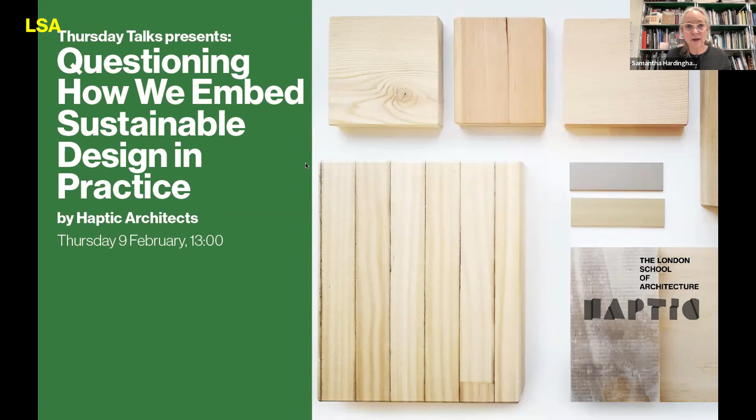Thank you, Sam, and thanks for the invite. It's really nice to be able to talk today. So what I'll do is I'll just quickly share my screen and get this presentation up. And here we go. Hopefully you should all be able to see my screen now. I'll just make that full screen.

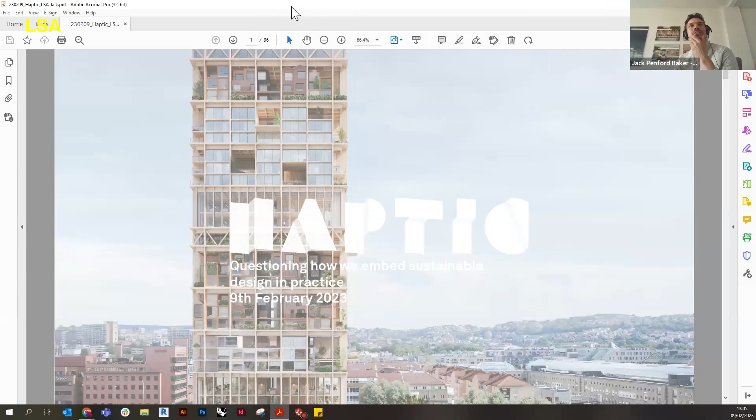We formed around 13 years ago, really a series of friends from university that came together and decided to go out on their own, so to speak, and set up what is now known as Haptic. This is us from the summer, out in Oslo, having a very nice time, but a very important time to meet with our fellow colleagues around our different offices.

That summarizes a little bit about us as a practice. We're around 45 to 50 people in total, based in London, Oslo, and also more recently in Bilbao. Our work bridges all three of these locations, but also further afield, both within the UK, Norway, and around the world.

The real purpose of the talk today comes from a conversation I was having with Sam about this idea of sustainability, the importance it plays within the work that we do, the impact we have within our profession as architects and designers. But I want to acknowledge there's a whole range of approaches, and there isn't necessarily a right or wrong. It's about a direction of travel that we're going in as a profession to try and help tackle this.

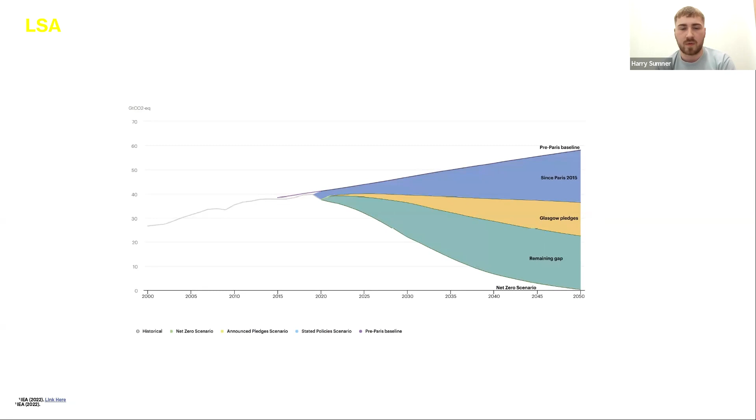The commitments that we've made—this you might have seen before—is from the International Energy Agency's recent predictions about the targets that have been set at national level and whether we're going to achieve them. It's not just a case of continuing with the same trajectory, but we have to keep increasing it to get to net zero carbon by those targets. So we are almost not working hard enough just yet. And that's really where this talk comes in.

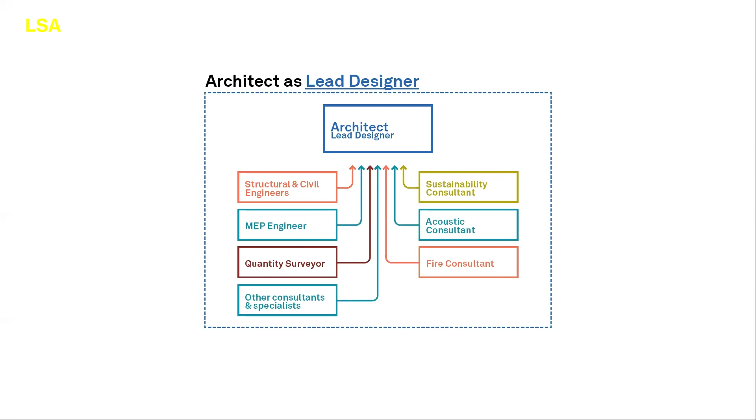Looking at the traditional or typical model for how we design buildings, organizationally architects are often the lead designer with lots of input from different consultants, bringing these elements together with lots of back and forth between the architect and various specialists. But today we're looking at a slightly different approach that's becoming more relevant, which is the architect having some in-house capability where it becomes more integrated, bringing some of these roles closer to the design process.

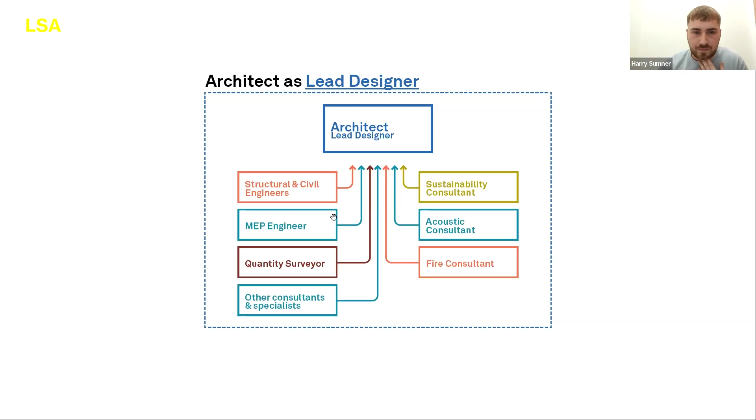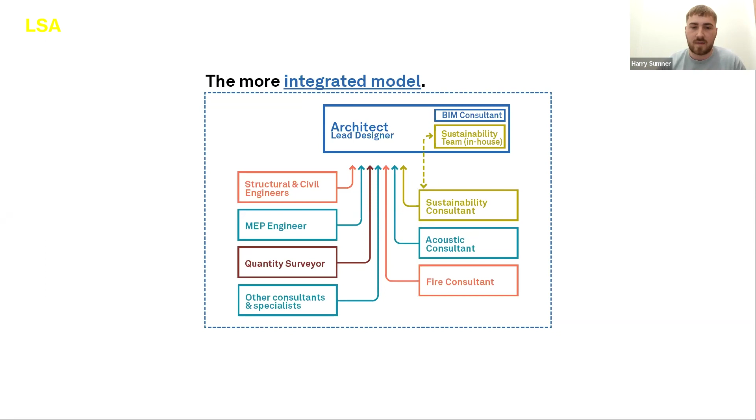Which is what we as Haptic have. Similarly, many firms are now taking in BIM as well and have other capabilities. Sustainability is the one we're looking at today—how we bring this in-house and close that gap between consultant and architect, making that translation into design more prevalent and efficient. It's not just us doing this, and many big firms have been doing this for a long time, but also a lot of small and medium-sized engineers are beginning to have their own in-house sustainability capability. If everybody is getting this slightly greater capability within the design chain, the product at the end must be better.

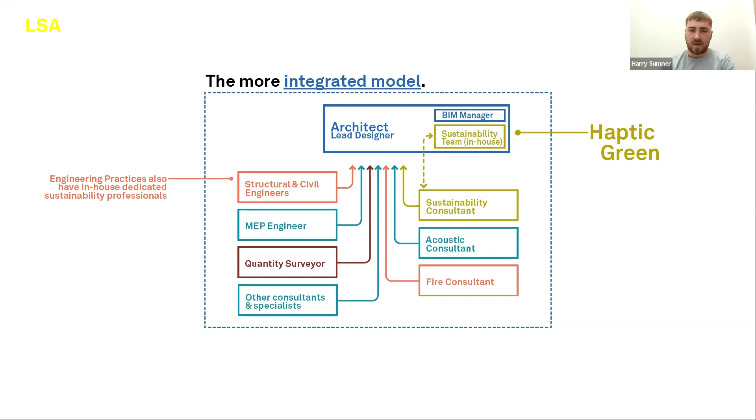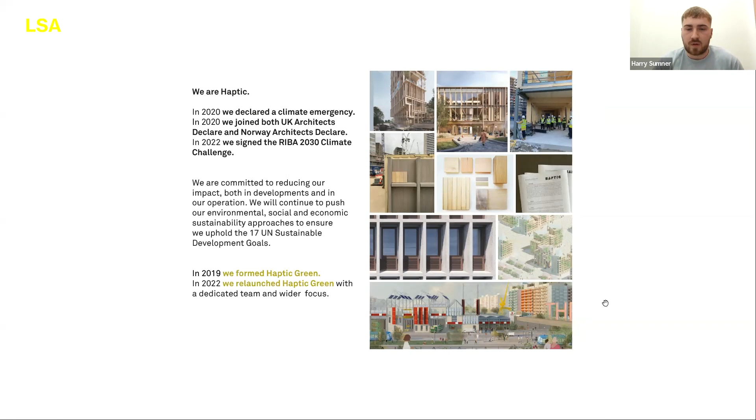That's the idea, and this is where Haptic Green comes in. We are the sustainability team, but also research and development embedded within Haptic. As a practice, we've made declarations both in the UK and for our Norway office, and we've set ourselves the challenge of adhering to the RIBA 2030 climate challenges, as well as achieving carbon neutral status by 2030 as a practice. Haptic Green comes directly into trying to achieve some of these goals, but also covers a few different areas.

We have 5 key workflows for Haptic Green, which we see as encompassing our role. The first, and arguably most important, is design and how we influence the existing design processes in the practice. But then it's about internal knowledge transfer, ensuring that everything we know as a practice—for new people, existing staff, and across our different offices from Norway and Bilbao—what knowledge we can bring and retain within the practice, and then deploy it when relevant to different projects to ensure the best and most sustainable outcome.

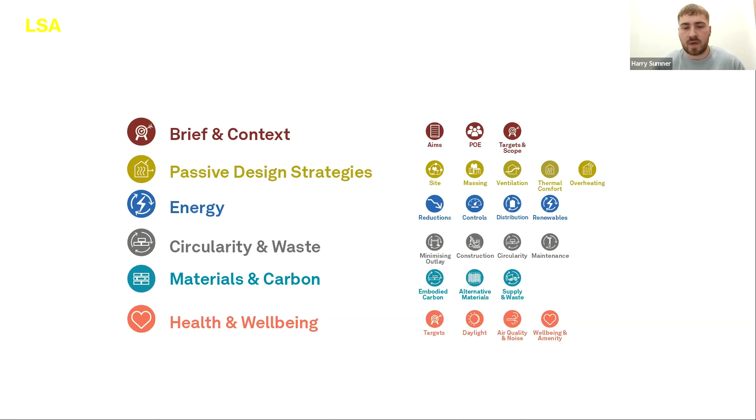So Jack, if you want to go to - about setting targets, for us we have come up with our own set of parameters that we as Haptic want to design to, and these are our key focuses. We have targets for a lot of these which align with the RIBA 2030 challenge, but also our own internal aspirations for energy, circularity, and all these different elements that we think are crucial to the total performance of the building at the end.

But to make this more manageable, one of the things we've done internally is create a design guide that helps us deploy these at really early stages. So from feasibility to stage 2 or 3, we have checklists that allow us to go back and ensure we're safeguarding the decisions we can, and we're questioning, where necessary, consultants' decisions to make sure we're really getting the most out of the projects, right from the beginning.

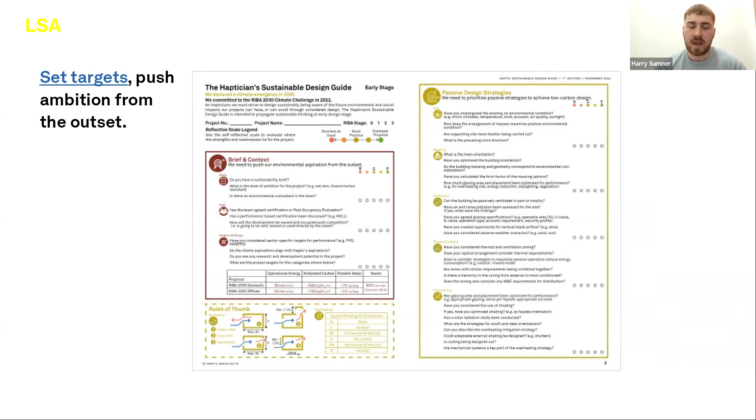The second point was to actually deploy these sustainable design principles right from the beginning. So even when we do feasibilities or initial concept design, it's about trying to embed those principles as early as possible so that they are safeguarded and become part of the narrative of the building as it develops.

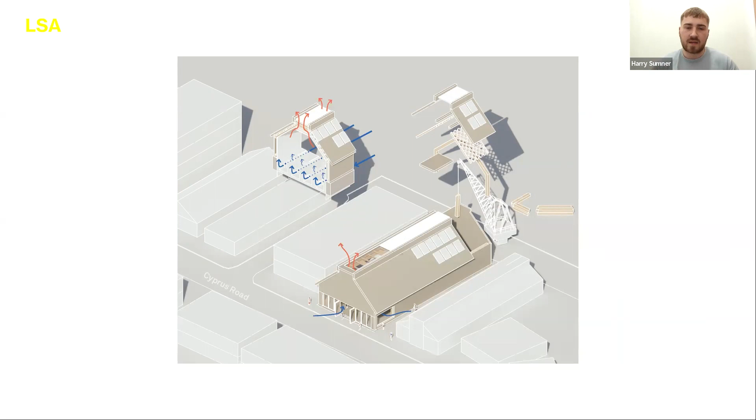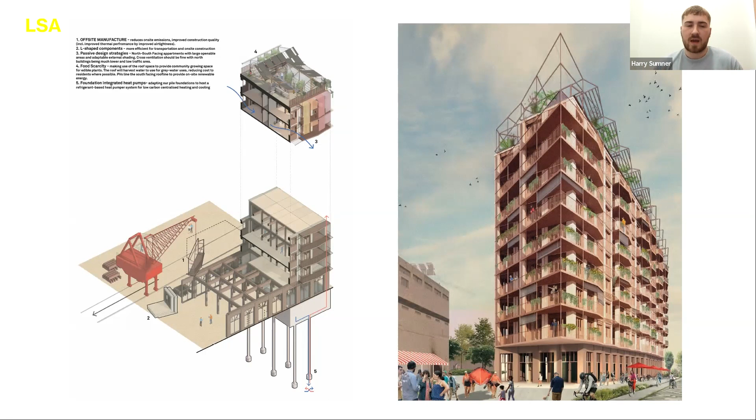Again, seeing how allowing these principles that we've come up with early on develop and influence the architecture itself, rather than becoming a back and forth between us designing and then a consultant trying to make it work from an environmental perspective. We allow some of the principles to be right there from day one, first discussion - this is what we're aiming for - and it becomes part of the narrative of the building.

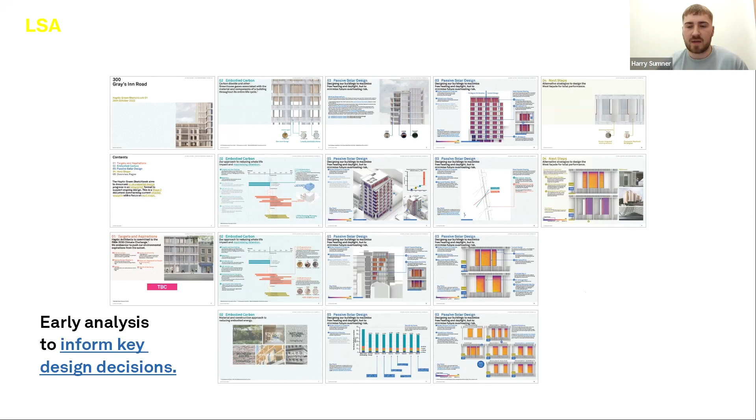Just as much as possible, integrating this into the workflow with an agile approach to analysis. Here's an example of GAs thinking about how daylight impacts it. If we had a consultant doing this, the time frame would be so much longer than this quick process of analyze, reassess, inform design and change, then assess again. So in that sense, this is the most important part of our role in the design process - once we've secured the initial strategies, it's about how we allow analysis to inform design throughout.

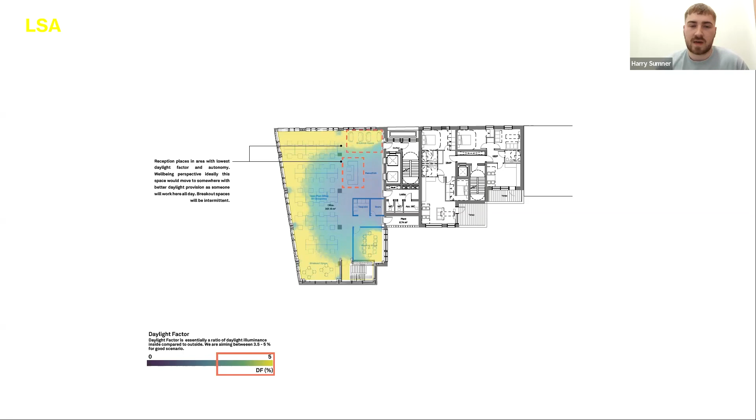There's another example of that - same process again, just agility. When we're modeling in the very initial feasibility stages, we can still be thinking about those sustainable design principles to ensure we don't commit to anything that doesn't work in future, and we come out with a much better outcome that has a more informed design intent.

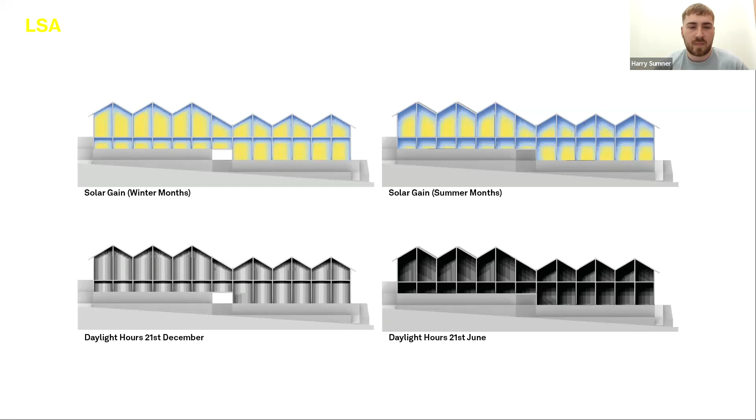And then I think the final one is just about employing a 360 degree inquisitive approach. We're not precious about the projects. In this quantifiable stage where we begin to review the projects, we have to be really open and transparent and inquisitive about what has happened, what we have done, and what we could have done better. That is how we close that loop and allow future projects to benefit from any findings of the projects we have completed.

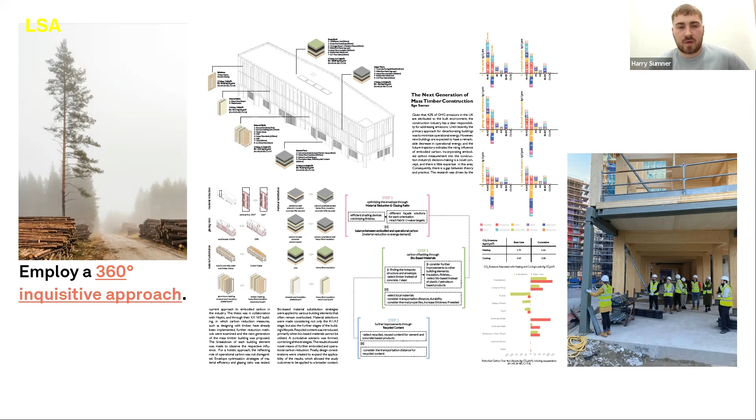The final bit is that we take that knowledge and share it between the practice, and ensure we document it so we don't miss any lessons learned. These two relate to residential and construction, but the idea is we feed everything back, because people are working across offices and different projects at different scales. We want to ensure that when we start the next residential project, we can already skip through some of the testing phase and understand what worked really well in the past and what gave us the best outcome, to really springboard the design process next time.

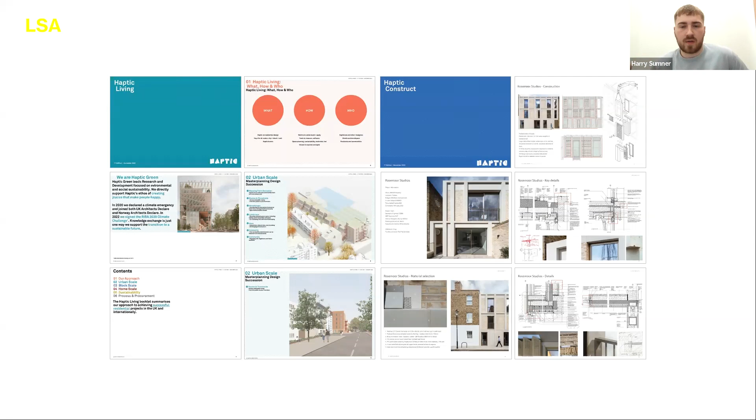So in that sense, it all closes the loop, and hopefully the idea is we just continually get more sustainable and more impressive outcomes.

As Jack already said, collaboration is key for us as small and medium-sized practices - that's something we've found incredibly important. On that diagram I showed at the beginning, that outer network ring - we're in discussions with many different universities, practices of similar scale, but also larger practices, constantly, discussing things across the whole range from design, operation, through to materials and research. That's really where the biggest acceleration in information comes from - through that collaboration network - and for small and medium sized practices that is the only way to really keep ahead with the way the industry has to change.

Great, thanks Harry. Before I go on and show a few examples of projects from in-house at Haptic, I wanted to dwell a little on the work that Harry does for us and the wider Haptic Green team in the practice. As architects, we have to do a lot, and we're all trying to do our best in terms of creating a sustainable future in the buildings, spaces and places that we design.

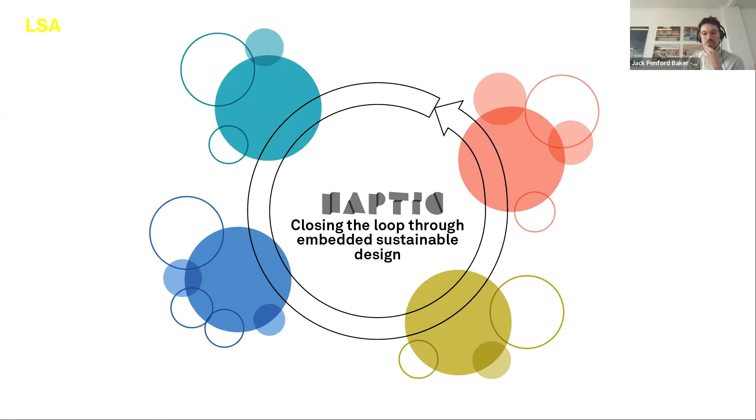So what I wanted to do is take you through a few schemes where Harry's touched on some projects in more detail from Haptic Green's perspective. But from an architecture side, I wanted to pull up a couple of these projects where they exist within that world and system diagram that Harry was showing.

So the first project is an inter-practice one in Bergen, Norway. It really comes from this idea of collaboration. Out of the 2016 referendum and Brexit, there was a conversation had between several friends and peers within the London architecture network, who really missed the fact that we're leaving the continent and wanted to continue a relationship with Europe, and beyond really.

So what was formed out of that was this network called Londonon, which includes ourselves, Haptic, Morris + Company, Gort Scott, Turner Works, Piercy & Co, Elliott Wood, and May Architects, and I believe a couple of others as well - forgive me if I've missed any off. But really it's a way to research and learn from places outside of the UK.

But at the end of a few years of doing that, and in lockdown, it became clear we still wanted to work out in Europe and abroad. So we looked at opportunities and competitions that align to the collective values, and we began to enter into them.

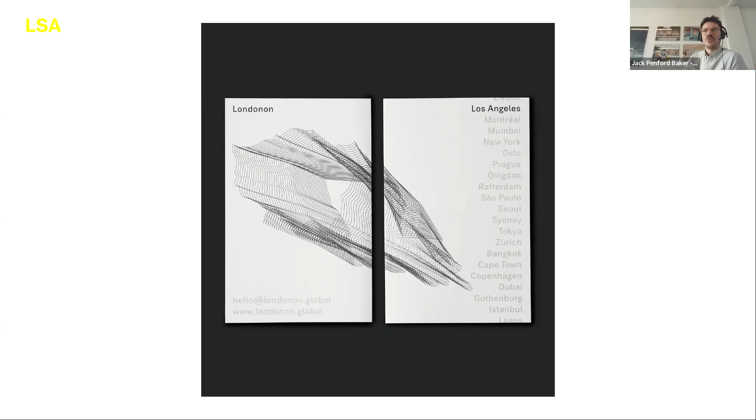The competition was essentially around creating a new neighborhood, a large urban scale master plan for the site, which thankfully we did end up winning collectively as a group. It was really down to our approach from the beginning, and as Harry mentions, around those first principles.

For this scheme, the core element was about retention and reuse of existing building stock. A lot of other competitors came in and got rid of a lot, making these massive moves. We approached it from the perspective of: okay, wait, let's start at the beginning and actually see how many of these existing buildings can we retain.

How many are in good enough condition that their structure will go on beyond their current lifespan? And then looking at ways we could use subtle interventions, almost like urban acupuncture, to slightly tweak and enable better public space, transforming what is in essence already quite a lively community over there on this site.

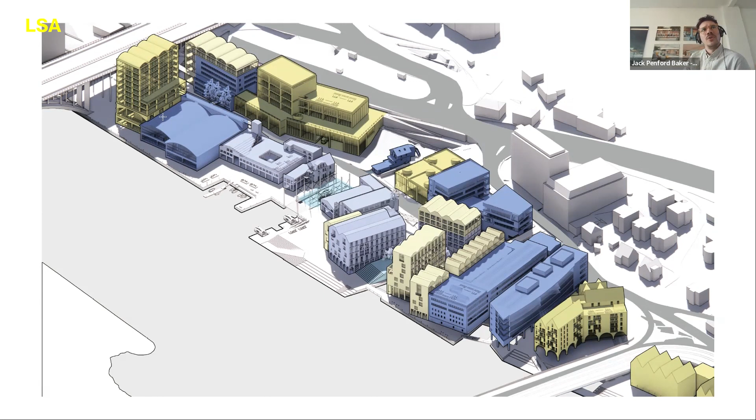And then beyond that, look at how we can bolster what is already there through new build, but again looking at low carbon led design and structure to install what you can see here. So anything in blue is an existing structure. The yellow elements are extensions and infills, and the bolder yellow are new buildings added in. They're either replacing old buildings that are completely unusable, or are intensifying and densifying the space. Then overlaying the program, really wanting to get this idea of a mixed use typology across the site.

And the final thing is driven around making a place habitable and accessible. So moving the shift away from vehicular movement and towards active measures of travel around the site, and greening that site as well, so that a pedestrian and bike friendly space is created.

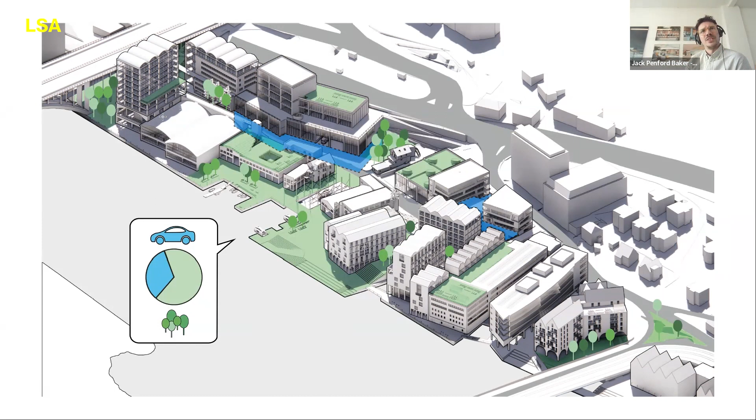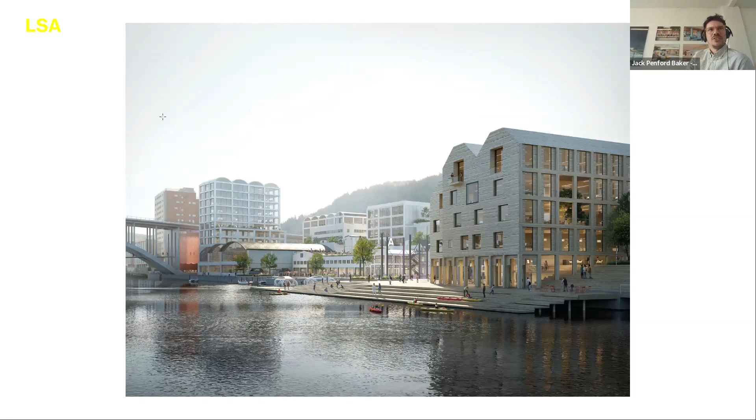So these are just some of the competition imagery. The project is ongoing at the moment. It's quite complex in terms of its scale in the city and its importance. But this shows that reimagining of this space by just transforming what's already there to create something that is new, but isn't necessarily an entire overhaul of exactly what was there before.

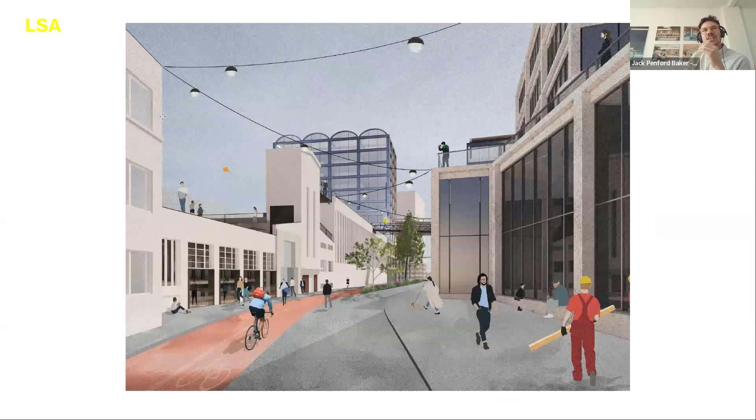And so some of the public spaces created around the site look at ways to promote that active travel in between these existing buildings, moving away from vehicular movement. A big thing here was looking at access over, because it is slightly separate from the city centre, and there's this huge, enormous 1950s concrete viaduct with a huge amount of lanes of traffic on top. The question a lot of people posed was about access and the severance of the river, the fjord.

And really, lots of people looked at creating a new bridge. But we looked at it like, well, actually, there's already a bridge there. It just isn't serving a purpose for those pedestrians and cyclists. So why not just use what's already there, suspend a new lower bridge across the river to give you that access? And even take that further, so this viaduct that is not particularly loved by everyone in the city, transform it into something that actually could be celebrated by the city.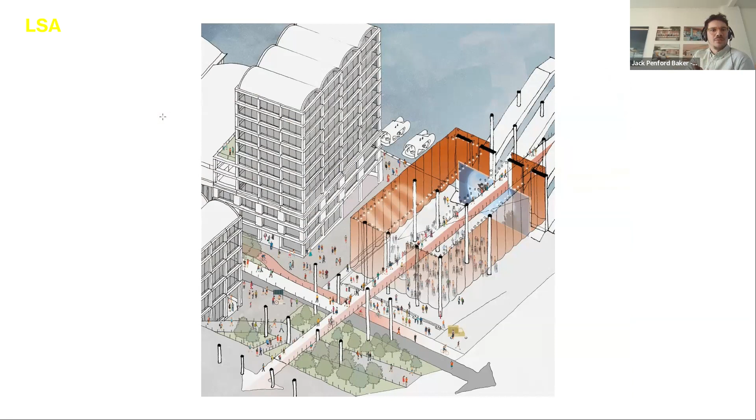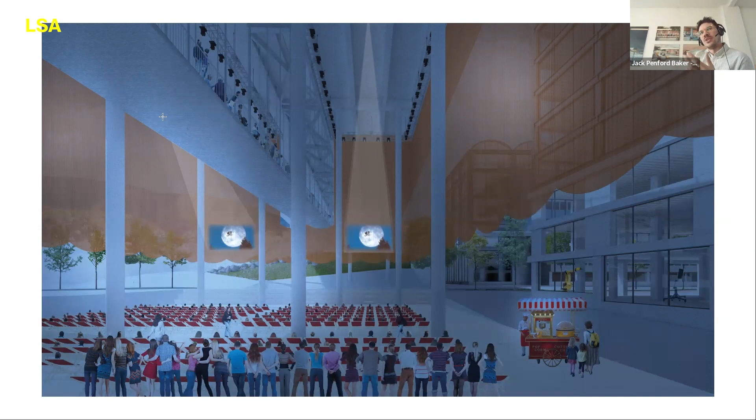So creating an actual usable space underneath it, a dead space that isn't really used at the moment, and looking at ways that it can be transformed throughout the day from a market to simply public space to even cinema screenings in the evening. And so really trying to push the idea of what we already have and reimagine its use.

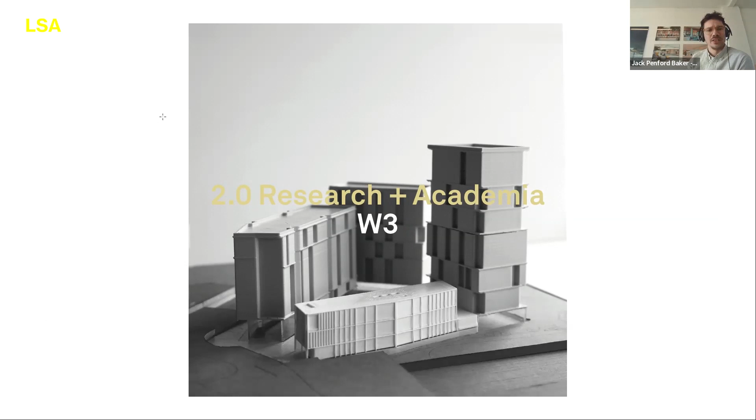The second project I'll touch on is W3, which Sam mentioned at the beginning, which is a community centre in King's Cross. It's one of the final pieces of the jigsaw puzzle of the decades-long master plan and development of the north of King's Cross station. And we won this competition several years ago now, and we're on site at the moment. It's due for completion this summer, which is really exciting to see it be built.

Because it is a mass timber building with a timber facade as well. Something that is a bit of a challenge at the moment in the UK in particular is around the attitude and relationship with the use of timber in our construction industry. So we're really, really pleased that we've been able to navigate those complex statutory requirements when it comes to the building and its use of timber.

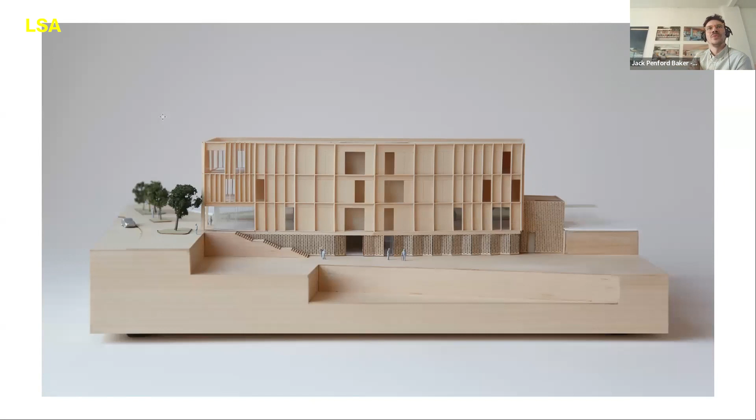And on a fairly complicated site, we're next to a huge swathe of network rail land with rail lines out the back of the building, and we've been able to create what is, at least, feels fairly modest in scale. It's a 3-story building, providing creche facilities, gym facilities, and other community spaces alongside what is a beautiful new landscape square within the building.

And here you can see some of the visuals produced at planning stage of the main entrance into the space. And really this was all about celebrating the sustainability. So that timber structure isn't like steel, which you're wanting to hide away behind plasterboard and so on. It is an honest building. It celebrates what it's built of. And that maybe is an architectural approach to the look and feel of it, but it also is really about reducing material use on site.

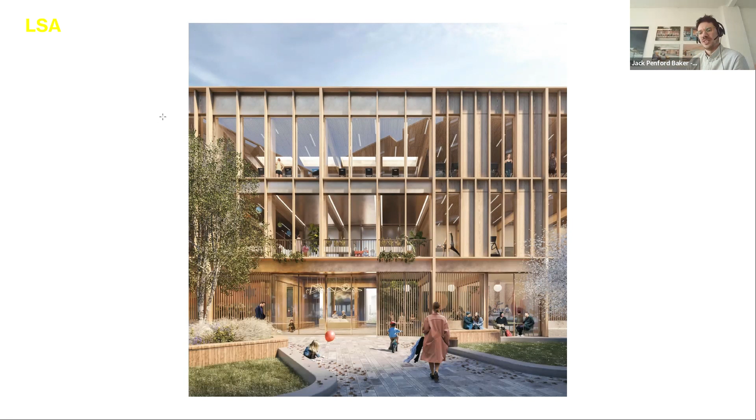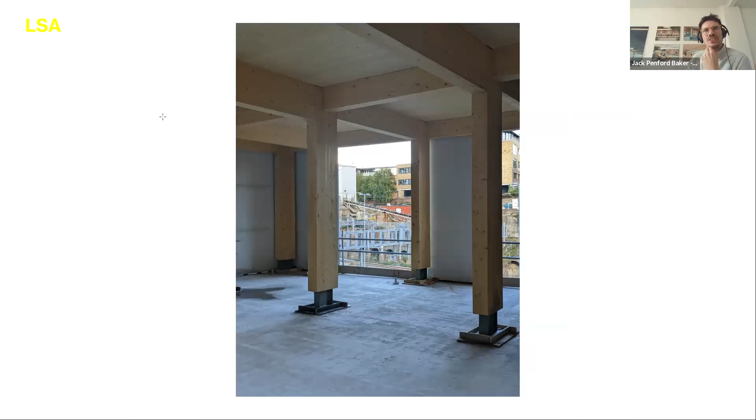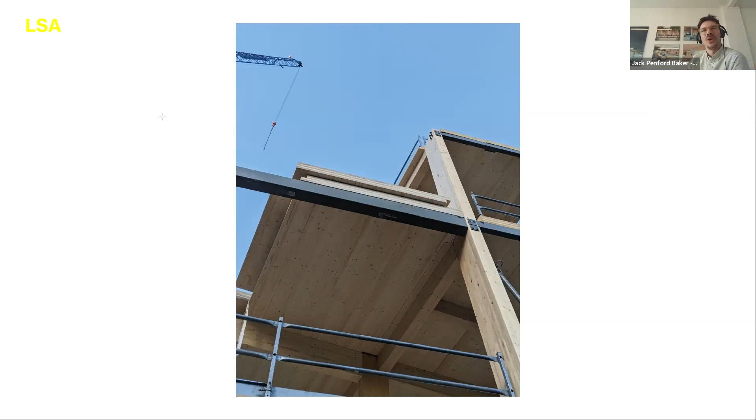So these are just some of the images of it on site, the material palette that we looked at using, and this is some of the construction shots. This is from several months back, before the externals were on, but you can see the approach to construction there. There's something very pure in the way it's pulled together, with the timber making up the majority of its structure. But really the point I wanted to raise on this project, which Harry touched on, is this link to academia.

As a practice, on this project our first principle was really to push the sustainability agenda, and the use of mass timber throughout is a significant component of that. But we really wanted to continue to learn and see how it can inform the next project.

So reaching out to some master's students at Westminster, as part of their course they were tasked with coming up with their own research thesis on an existing project and collaborating with practices. A student joined us and was looking at the W3 building, looking at the buildup and embodied carbon associated with the different walls, floors, and roof finishes throughout.

What was really fascinating was that this wasn't us - this was part of our network, and we weren't in control of the direction they were exploring. But because they had the agency to look at it as a university project and then relay their findings back to us, we had the most interesting discussion with them around how they approached it - looking at different options for the different buildings, assessing the embodied carbon in each, and seeing how much further we could have taken it.

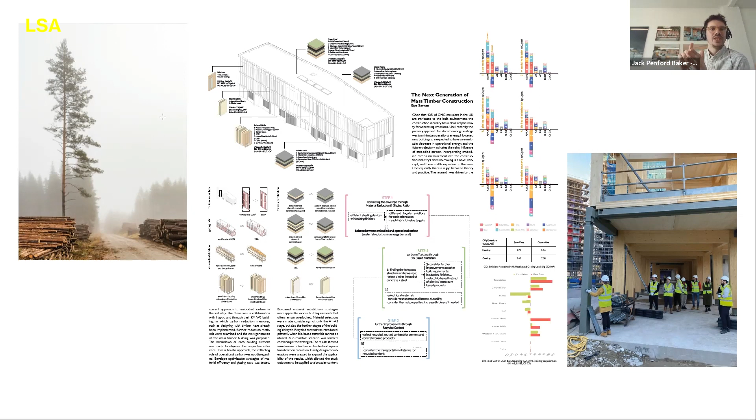I think that's a big thing to raise here - that we're forever learning and developing our strategies and approaches to tackling the climate and biodiversity emergency we're in. If we're able to feed that back into the loop and accelerate it at the same time, we can be learning at a far quicker rate. That means it isn't the duration of a construction project, say 4 to 5 years, that we're then learning at the end of - we're able to accelerate that feedback loop, so at all stages we're still learning and feeding into the next project to help accelerate that on.

The final project I'll touch on is one I've given the title of speculation. For the audience today, of course it's the wider practice network, but being with the LSA, I know that a lot of students at the LSA and wider around the world, even in architecture, speculation is this big factor of their core studio work - that freedom you have in a project to explore ideas and themes and research. That's really where you're able to push things beyond what is generally quite a complicated, challenging thing to navigate when it comes to the realities of a real world project.

So just over a year and a half ago as a practice, there were a number of conversations happening around the use of mass timber, as I mentioned about W3, and the relationship in the UK - but over in Oslo and Norway they have a slightly different attitude to the use of timber in construction. We were looking at this idea around the intensification and increase in density within our cities and the acceleration happening there, but combining that with this idea of adaptive reuse.

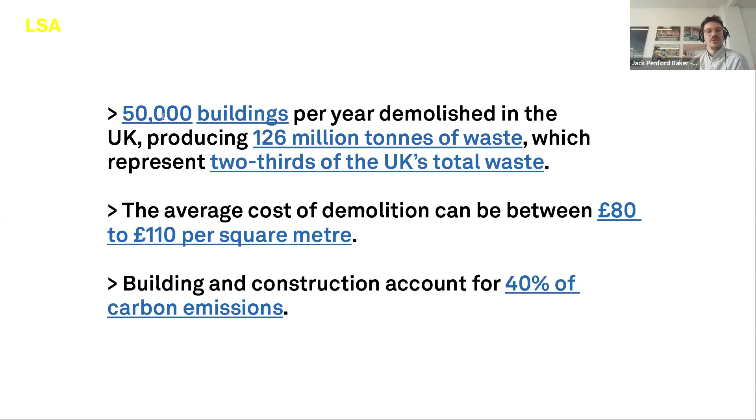Taking on board the fact that we need to move away from a building that is a cradle-to-grave system, simply built and then demolished at the end of its lifespan, because there's a huge amount of embodied carbon within that. Looking also at the fact that 5 cities have 66% of the 218 skyscrapers being constructed at the moment in Europe, with an acceleration—we just hit 50% of the global population in urban areas, and in the next 7 years we'll be hitting 60%. So there's this real acceleration of people moving into cities, towns, and urban environments.

So on top of the general retrofit and reuse of existing stock, there's this question around adaptive reuse—rather than approaching an existing building which wasn't necessarily designed to be reused in the future, but we're able to do it, though it's still a challenge and complicated, what if you were to actually design a building with the pure intention that it could be reused in the future, when the program changes, when a city changes, when its needs are no longer required?

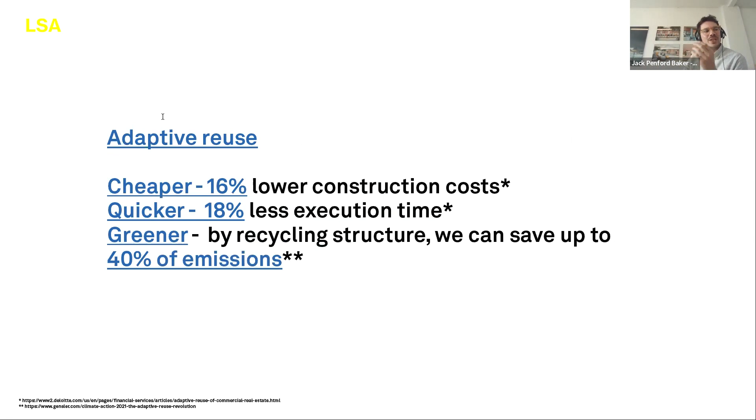This idea around adaptive reuse is talked about a lot—it's not just specific to Haptic. What came out of this conversation was, well, why don't we actually take a look at it as an office? Why don't we give ourselves that freedom, outside of having a client or other constraints that would limit us, to really test and provoke a conversation in our profession, with our peers and clients, around the idea that if this is what our city currently looks like—lots of tall glass buildings—why are we not asking the question of building towers like this?

Why are we not looking at something a bit different and building out of mass timber? We know that in the UK, if it was to be released, it would be an incredibly contentious scheme, but that's really the purpose of it, because there are big conversations we need to be having.

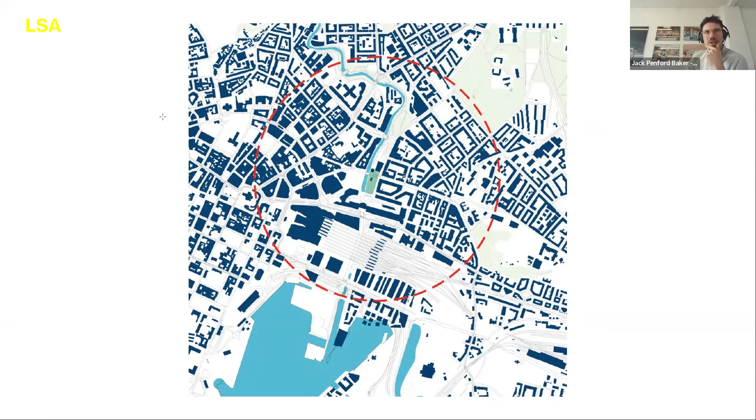So we chose a site, a very complex site within Oslo, which straddles the east-west boundaries of the city, with different demographics living in each area, on top of a bridge with a road network, but also a waterway running through the site. You can see it here in its current form—lots of multiple levels, a big gyratory running through.

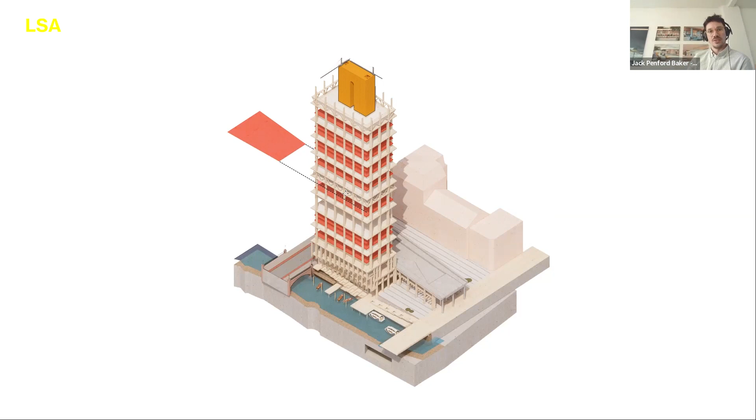We approached it with Ramboll engineers to look at how we might design a building from the get-go, knowing that it would be adaptable in the future. This concept of every third floor becoming a permanent structure, with the space in between as soft floors, so that you're able to remove them, move them around, take them out if needed depending on the program you're putting in. The central core is a concrete core that's there to permanently stay, but still gives you enough flexibility with services being able to be pulled out and in.

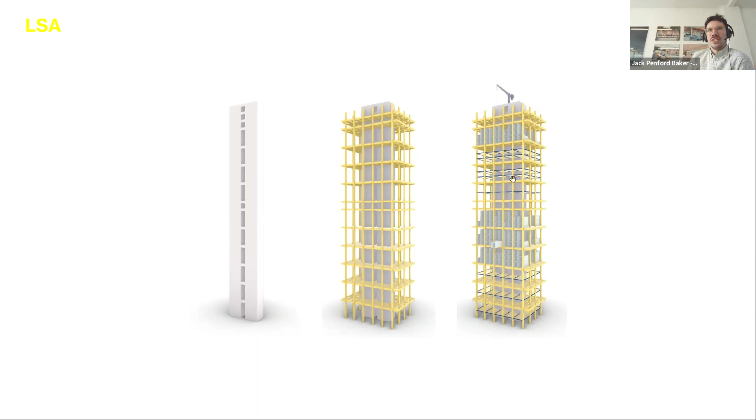This is looking at that structural grid—you've got your primary structures starting with your core, the main floors every third level, and then this idea of how you insert the soft floors or even stacked pods within. It can, on day one when it opens, have its own set mixed use, but the idea is that you can develop that over time. These soft floors can pull out, the core elements can also pull out—it's all accessible.

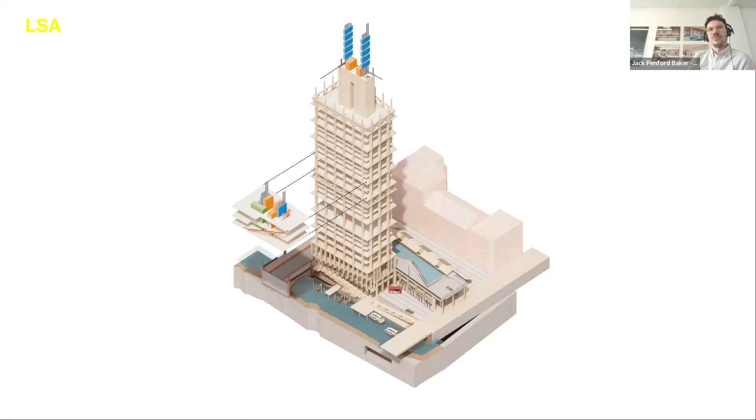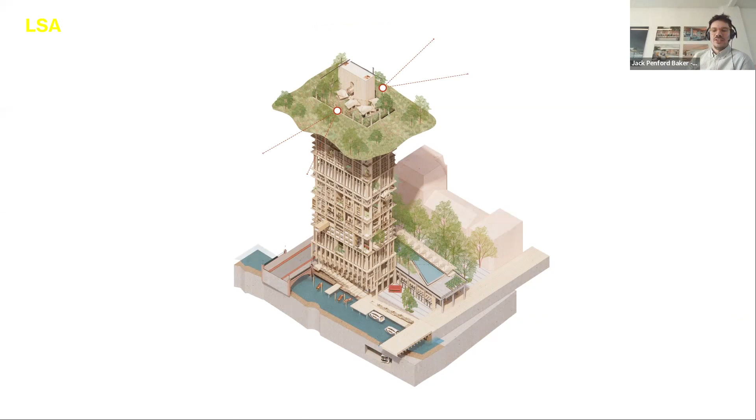The ground floor is working really hard to overcome a lot of the complexities on the site itself. A big thing in Oslo is that there aren't that many tall towers, but it's got the most phenomenal landscape and environment around it, so whether you can actually bring a bit of that into the top of the tower as well. And as I mentioned about the west and east aspect of the city and the societal impact it could have, this idea of it being a bit of a bridge between both sides of the city, almost a mixing pot of both, that it's got something to give back.

Apologies, this was meant to be a GIF.

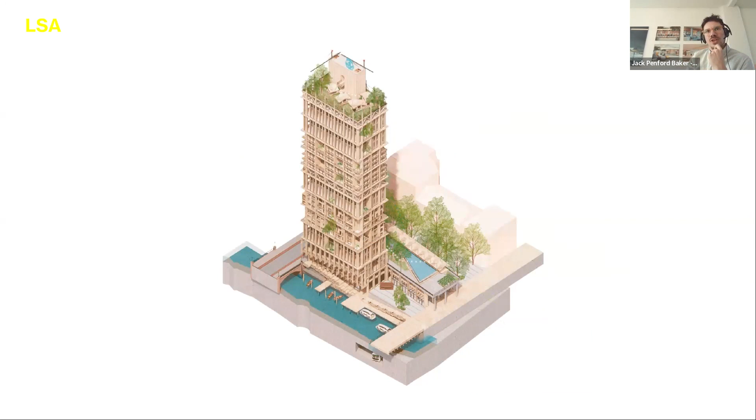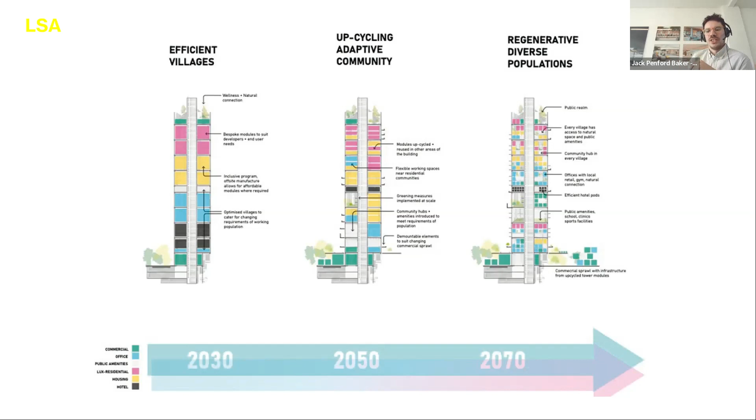So if you can all imagine that this is chopping and changing between the different programs within, this is the idea that we really wanted to explore ways in which you could create this notion of adaptive reuse, and then looking at the MEP, servicing and embodied carbon aspect of how you might adapt it over time with these different uses.

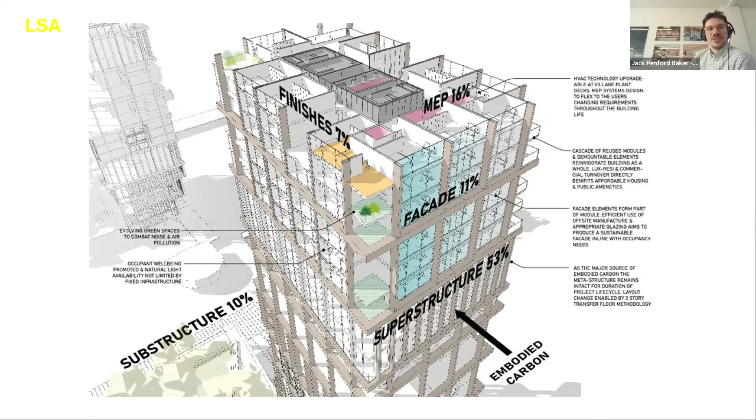And that it can become a regenerative tower. A big thing I wanted to finish on is this idea of the embodied carbon, and that the superstructure equates, on average, at least in this building, to 53% of the embodied carbon. So if you're talking from the beginning about building something permanent that gives you that adaptability, it means already from the get-go you're setting up that principle of reducing embodied carbon.

And these are just some images of the scheme in its setting, with that sort of mass timber really celebrated.

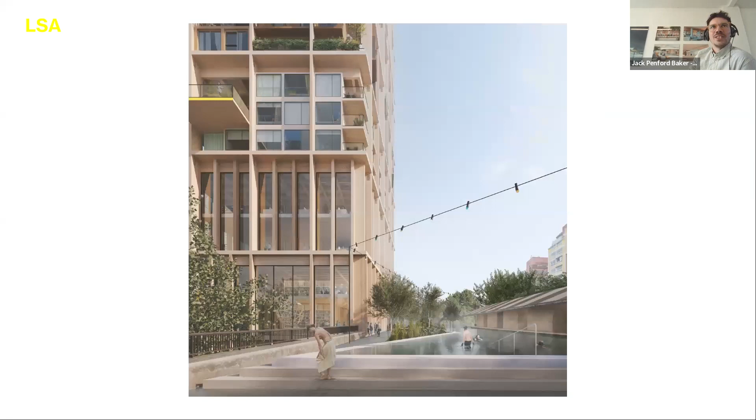I think I'll finish there. I just wanted to reiterate, particularly on that last project, that this idea of speculation is really paramount in anything that we're doing. It's something that exists and you learn and build on at university, but it should never really leave you, because it should always be you questioning and challenging what's happening, so that you can really make a difference and push things forward, which is incredibly pertinent right now. So yeah, I'll leave it there.

Great, thank you so much, Jack and Harry. What a fascinating 45 minutes. Really so much to dig into.

I think, well, we have exactly 13 minutes. If anybody, and you've got some hand clapping, silent hand clapping going on in the distance there, for any questions, are there any immediate questions? If anyone has a question, could they raise their hand? I don't see any hands being raised yet. It may just be everybody being shy.